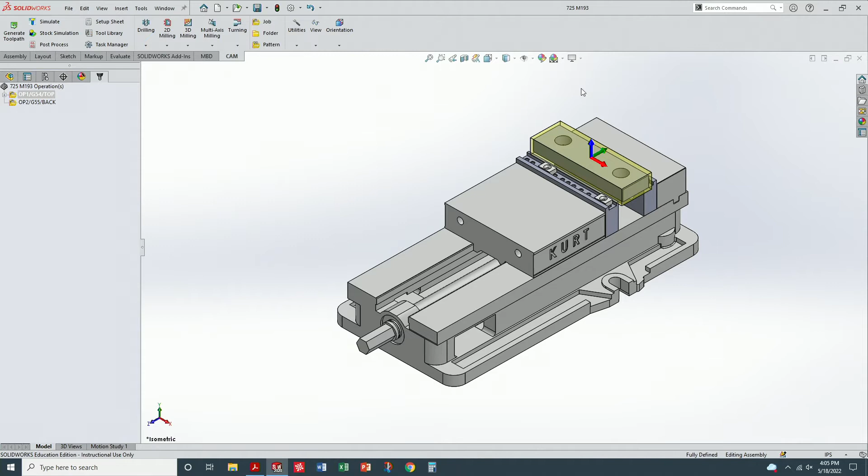Let me pull up my model here, and I'm going to go to the right-hand side. I'm going to pull up my edge break, and I am going to simulate what this is going to look like. So here's our tool at our feed plane. Now, our feed plane is at 200 thou above the part, but this one here I didn't adjust. So as we hit play, we're feeding down to our cut depth, and notice how we are offset from the stock. So I'm going to pause it right there.

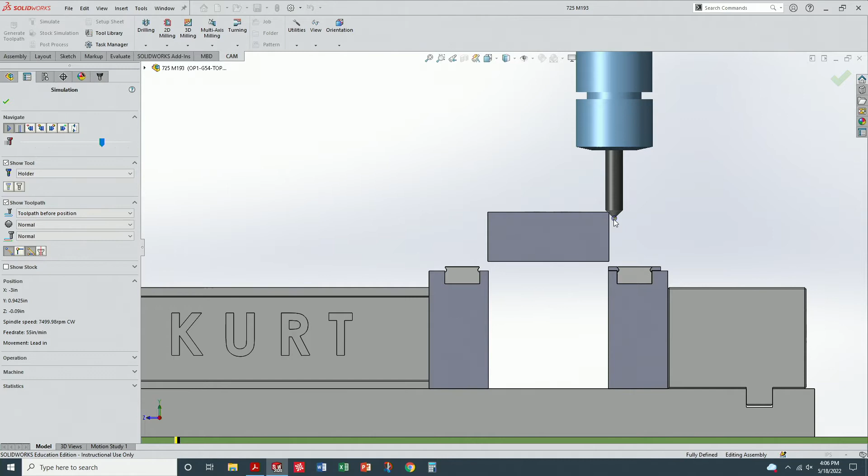So that's where we need to land on the cutting edge to put a chamfer on the edge of this part. So if you can take a look at the diameter of the part, we're going to use frame to do this. We're going to have to address the radial offset and the axial offset from the tip, because notice we are down below the top of the part. We must have our cutting edge intersect this corner.

So our edge break is 20 thou. We decided that from the print. All edges must be broken 15 to 30 or so. I forget what it was, so I decided on 20. Then I decided how far up the tool to go, and I believe I chose 70 thou. Okay, this side of the tool is only 1/8 of an inch tall, and we have the flat at the tip that happens when they grind that has to be taken into account too. So this is going to be a little difficult for us.

So first we need to decide which tool our chamfer tool is going to be. Let's number our tools sequentially, so we'll call it tool 4. So to insert a tool, I will get below where I want it to be inserted and then come down and F3, insert. That brings up my insert options. I'm going to select tool. Tool number is going to be tool 4. A description of the tool: 1/4 inch, 2 flute, chamfer mill. Okay.

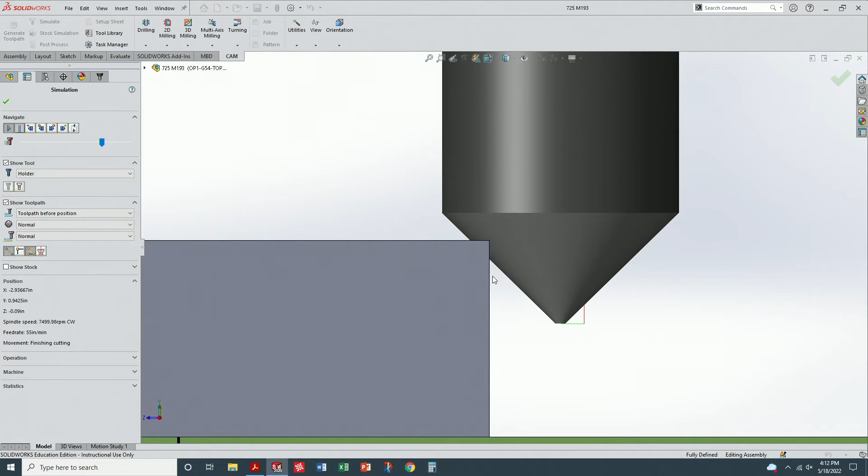Okay, length. Let's go ahead and leave our frame size the actual size of our part. We will offset radially by messing with our tool diameter. Okay? So 6 inches and 1 point, oh, let's see. Do I even have my computer up? Yes, I do, right here. Let's see. 1.735, and that is correct, 1.735. Corner radius, so this is kind of nice. It has brought stuff forward that is good, so I'm glad to see that.

Okay, depth. I do not want to go down to the bottom of my part. So how far below the top of the surface do I want to go on this 90-degree edge of the cutter? So I told it the diameter was 1/8 of an inch. So that means the cutter is going to cheat radially in towards my stock half of that, 0.0625. Okay, so let's try 0.0625. And I want to do all of that per pass.

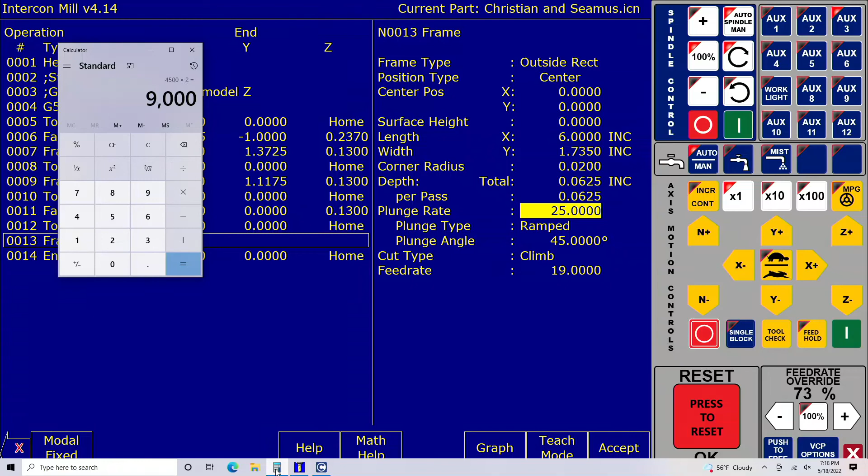Plunge rate 25. We are going to be cutting here. So for my plunge rate, I need to do some quick feed rate calculations. Who remembers what the formula is to calculate feed rate? Feed per tooth times the number of teeth times RPM. Feed per tooth, number of teeth, and RPM. So, I already know the RPM is 4,500 times 2 teeth times, I'm going to do a 5 thou chip load. So 45 inches a minute is my feed rate. So cool. I am going to leave this plunge rate at 25 to help out my tool a little bit.

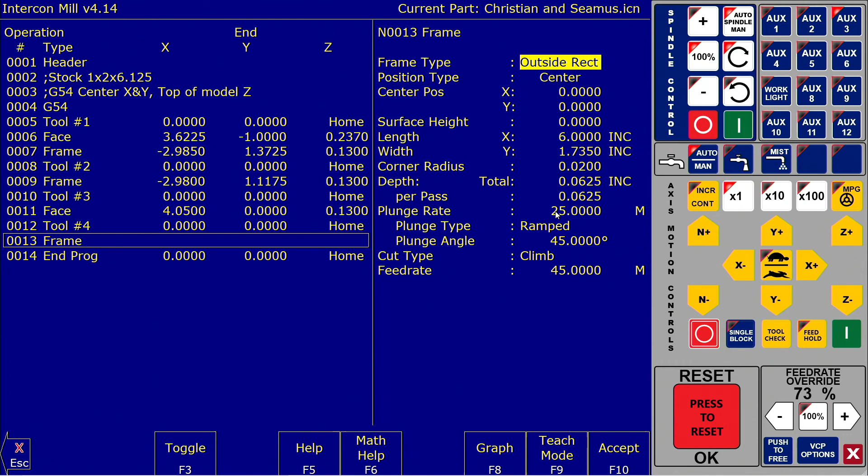Come on, we can do this. There we go. So 45 for my feed rate. And we are going to climb. We're going to do climb tool paths unless there's a reason not to. All right, and accept.

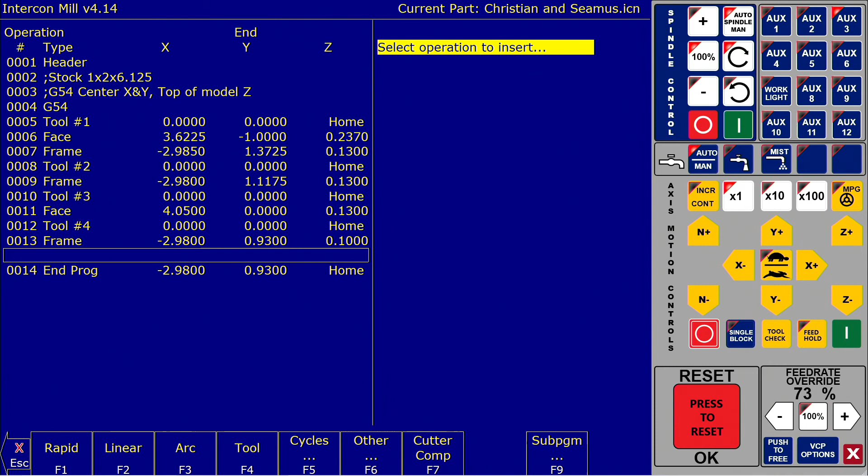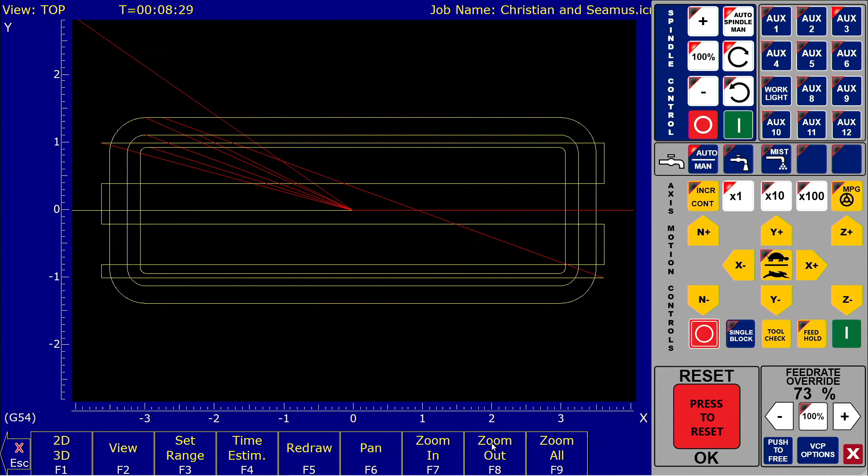So now what I want to do is I want to graph my edge break. I'm in the insert screen. I need to come out of it, so I'm going to hit escape once. I'm going to hit F8 to graph my tool path. Okay, this is from the top, and you can see the 3 rectangular rings. The farthest one out is my roughing profile. The next one in is my finish profile, and the closest one in is that edge break. So the intel I can glean from this top-down view is if everything is centered in the same place. That's about it. It looks like it should be right.

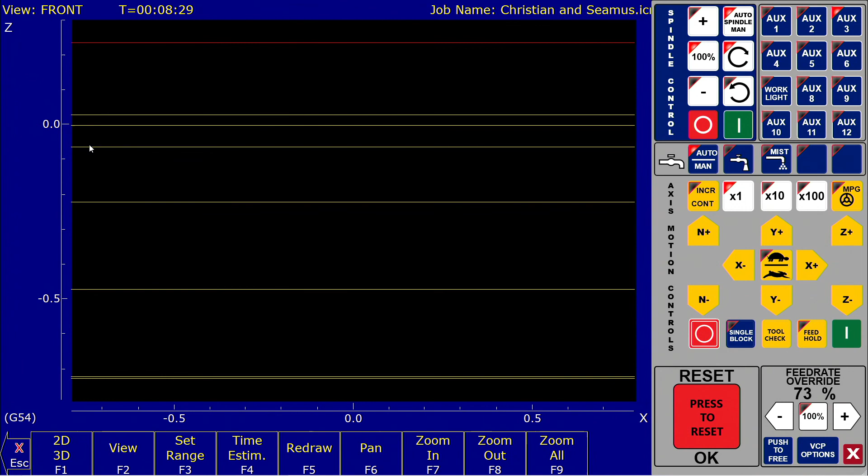So let's go ahead and change views to, I'm going to look at the front view. Okay, and I'm going to zoom on in because what I want to show you is these 3 right up here. So I have my rough face, my finish face, and then this guy is how far down the tool is, the tip of the tool for my edge break. So that's about the best I can model so far. So I'm going to go ahead and I'm going to save this by hitting post.